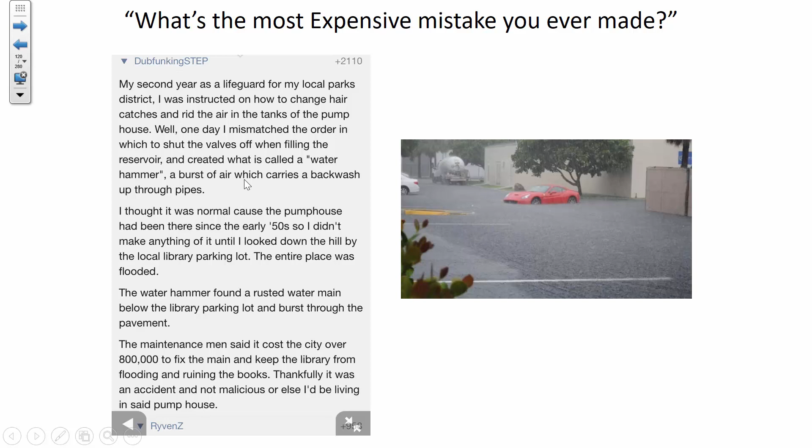So let's talk about that today. There is an interesting video that talks a little bit about water hammer. We'll watch just a couple of moments of that.

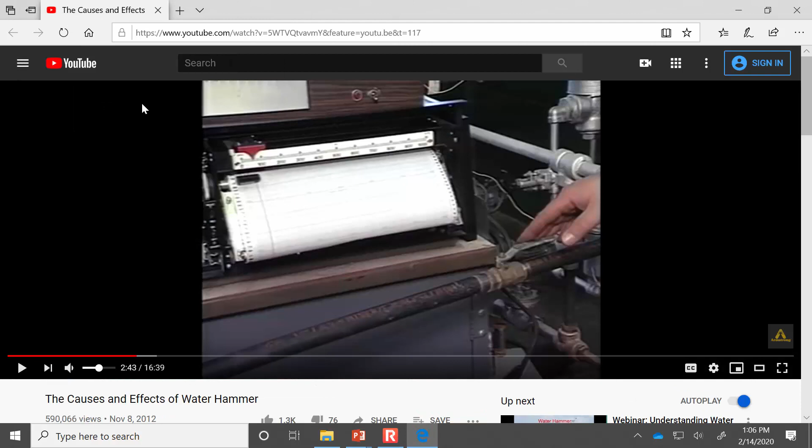It's about momentum. The water is moving through the pipe at a certain velocity, it has mass, and it's decelerating very quickly. If you look at this valve, it's just a quarter turn, and it's instantly going from all the way open to all the way closed. Now that's in stark contrast to a gate valve, where as you turn it, the gate is slowly going down, creating a smaller and smaller opening in the pipe. A ball valve can be closed very quickly, and that's why, as the water is flowing and suddenly stops, we get an increase in pressure.

So what we're going to do is talk about the conditions that cause water hammer. That illustration, I think, does a great job setting the stage. So let's consider it, in this case, starting with a reservoir, because that's as far as the water hammer will go back towards the reservoir if there's one connected to the pipe system.

Initially water is flowing in steady flow conditions, so the water velocity in the pipe is steady, it's not changing over time. The valve is open, the water is flowing freely. How you'd measure the pressure in the pipe would be the pressure caused by a certain depth in the tank. So it's pressurized here, and then the pressure is decreasing in the direction of flow, due to pipe friction.

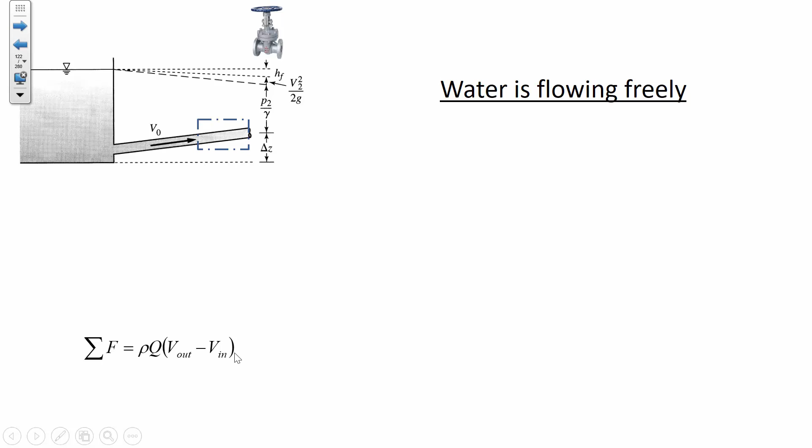So if we apply that momentum principle to this control volume, under steady state conditions, the velocity out and the velocity in are the same. So there isn't any force required to hold that system steady if the flow out and the flow in are the same. But when you suddenly close the valve, there is a temporary difference between the velocity in and the velocity out.

In this control volume, the water close to the valve—the velocity out—is temporarily lower. That's partly because water isn't completely incompressible like we often assume. Water is mostly incompressible, but it requires enormous pressures to compress it.

For a small period of time there's an imbalance between velocity in and velocity out. So the water near the valve stops, and there's a buildup of pressure because of the deceleration. Remember, convective acceleration occurs as a function of position rather than time—local acceleration is when velocity changes over time, but convective acceleration is when velocity changes in the direction of flow. So the velocity out is less than the velocity in, creating a velocity gradient that causes a pressure buildup.

So the pressure is really high right next to the valve that just closed, and the pressure wave starts to reflect backwards, traveling at a speed known as celerity.

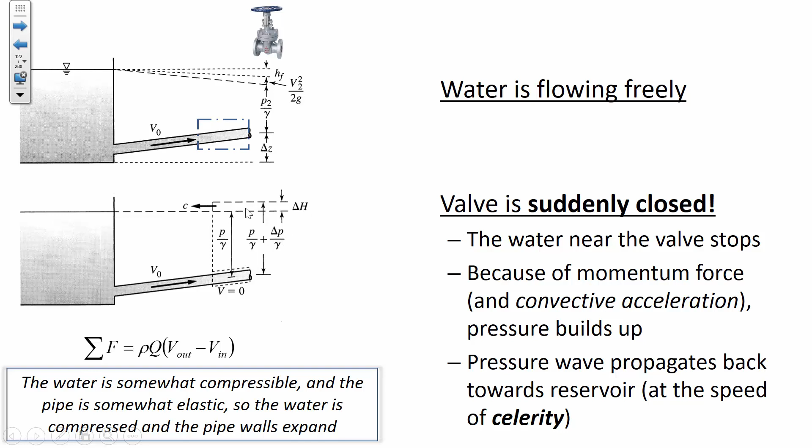So temporarily there's more energy in the pipe than in the reservoir because the pipe expanded. Eventually the pipe expands as much as it's going to, and the water stops—the velocity is zero, the pipe is expanded, and there's more energy in the pipe than in the reservoir because of that expansion.

Now the water starts to flow from the pipe back into the reservoir—the water's going backwards. The reason is that the expanding pipe is beginning to contract again, since it was holding a little extra water volume; because the pipe got bigger, there was more water in there than it would normally handle under ordinary pressures. So the water flows from the pipe back into the tank, and that shock wave is returning back towards the valve again.

So the C means the pressure wave is reflected off of the reservoir back towards the valve, now a little bit lower than the first wave was. There are some energy losses each time that shock wave reflects between the valve and the reservoir, but it can make the round trip several times before it's low enough, and before the expansion and contraction of the pipe absorbs the energy of the impact. The first video we watched talked about it as a certain mass of water that suddenly stopped—it's as though an actual hammer is hitting the valve.

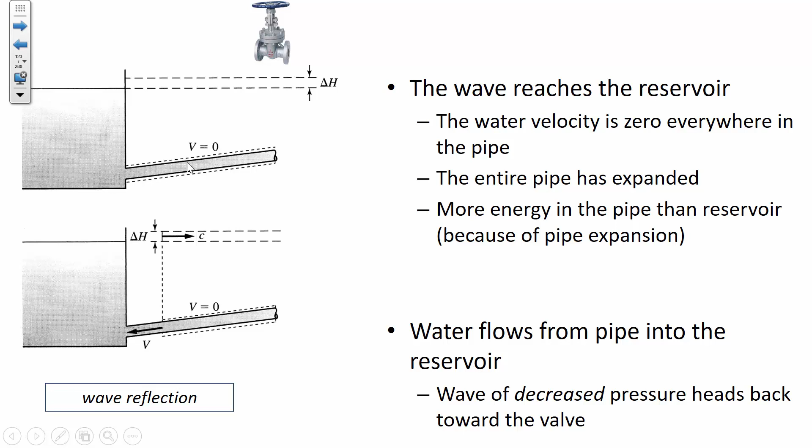Because the key to preventing this whole process is you have to close the valve slowly. If you close the valve suddenly, that causes the water hammer. But closing the valve slowly means that if you close it slower than it takes the water to go to the reservoir and back, the pressure wave won't build up.

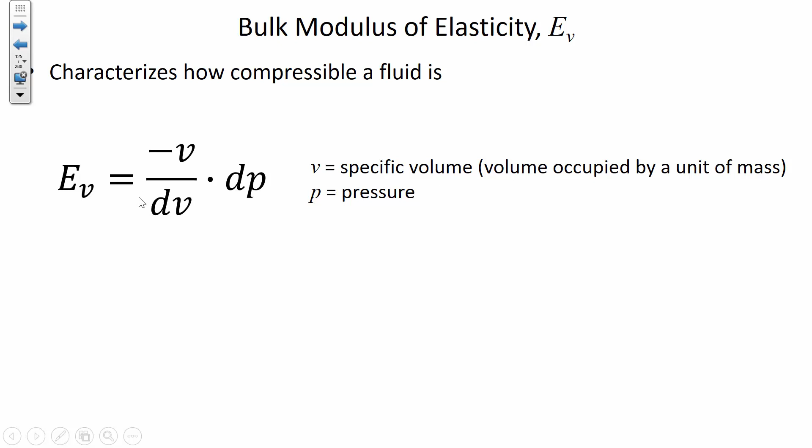Now here are the applicable equations we use. The bulk modulus of elasticity is a physical property of water that describes the unit change of volume that water occupies as pressure is applied. It's a physical constant that says how much dV, how much the water volume changes, when you apply some differential pressure. We can look up the bulk modulus of elasticity for water at a variety of different temperatures, and it changes slightly based on the pressure conditions. As the pressure goes up, it requires progressively more and more pressure to increase how compressed the water is.

In the textbook, I'll point out that Table 2.3 has a bit of a typo: these bulk modulus units are times 10 to the 9th, not divided by 10 to the 9th. So be aware of that.

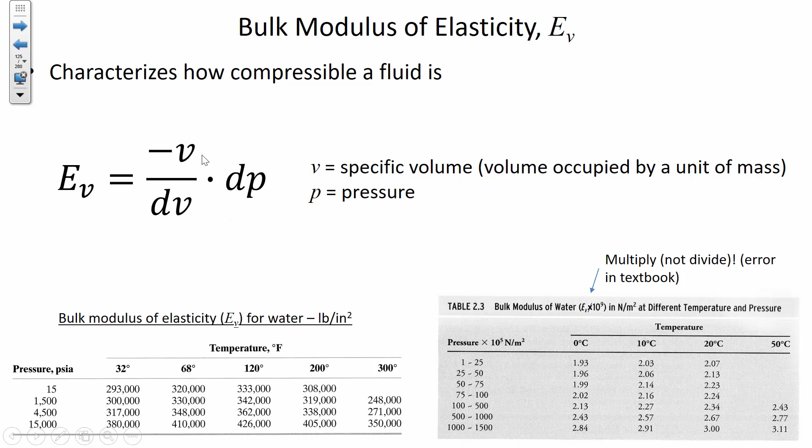So you can think of this as, for a certain volume, how much the volume decreased relative to itself as pressure was applied.

Now celerity can be estimated by first knowing what would be the velocity of water if it's traveling through an infinite extent of water not confined by a pipe wall. The typical velocity of the shock wave just through the ocean, where there are no pipes to interfere, is about 1440 meters per second, based on the ratio of the bulk modulus to the density of the water. We could calculate the same physical constant, celerity, for other fluids besides water that have different compressibilities and densities, but since we're in hydraulics, water is the fluid we're most interested in usually.

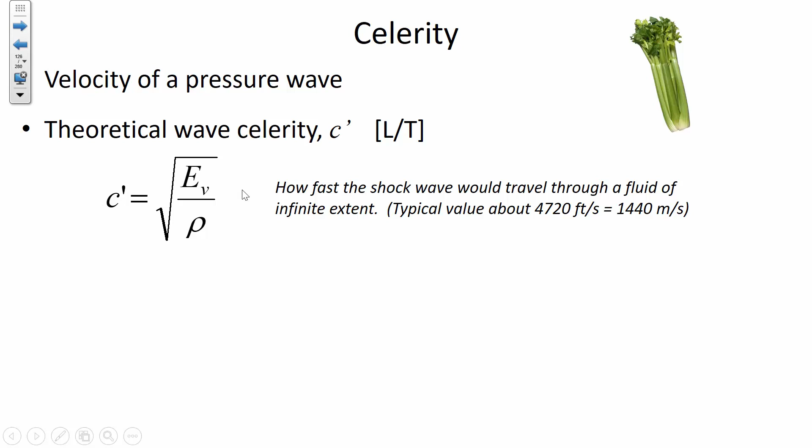So the theoretical wave celerity we can calculate just based on the physical properties, but then we have to know something about the pipe that the shock wave is traveling through. The actual velocity of the pressure wave in a confined pipe depends on the theoretical wave celerity if it wasn't in a pipe. But then in the denominator of this ratio, things like the pipe modulus, the diameter of the pipe, and the thickness of the pipe—the physical environment the shock wave is traveling through—become important parameters as well.

And so in Table 8.6 of your book, it has the modulus of elasticity for a variety of different pipe materials. Some of them are soft, like lead. If you're using lead, number one, that's not so great for environmental and health reasons. But also, because it's so soft, it can expand and contract really easily. So if there is a water hammer in a lead pipe system, it's going to be a lot more serious because more water is able to enter into the expanded pipe, and when it contracts, there's going to be an even greater volume of water traveling back towards the reservoir.

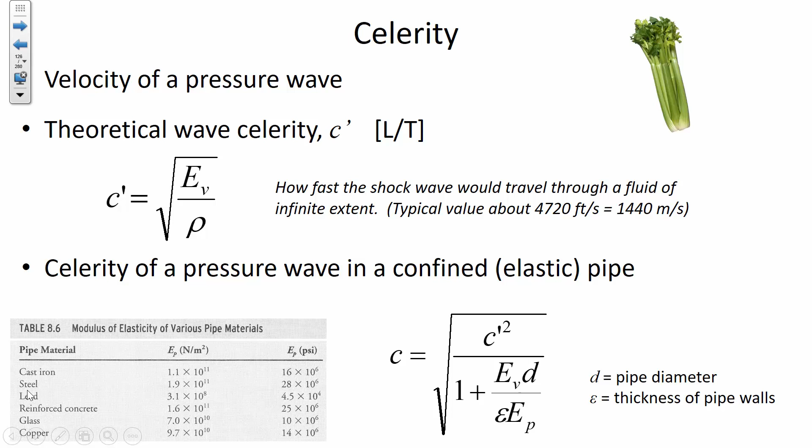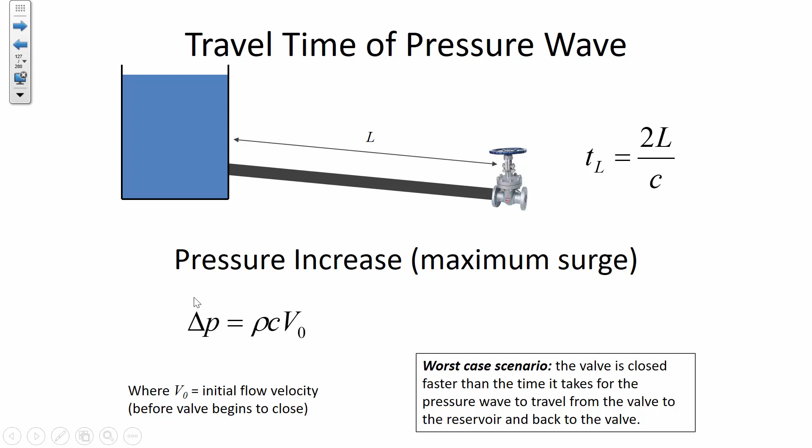If we want to know the maximum pressure that could accumulate due to this shock wave effect of water hammer, we'd need to know the initial velocity, the celerity, and the density of the fluid. The worst case is if you close the valve faster than the round-trip travel time. If you close it more slowly, it's not that there isn't going to be any pressure increase, it's just less than it otherwise would be. We have equations to calculate the pressure increase when closing the valve longer than T sub L, but this delta P formula is the pressure that accumulates if you close the valve faster than the round-trip travel time.

To get some experience using these equations, let's work this problem with traditional units, where we know the physical length of the pipe, its diameter and thickness. Here is the pipe material modulus, and the physical properties of the water: the bulk modulus and the density. We want to know what pressure increase we're going to see, the delta P, if the valve is closed instantaneously. Whether it's closed instantaneously or just less than this maximum travel time, it has the same effect.

I've laid the equations out in the order that you'll need to substitute them, starting with the average velocity, then the theoretical wave celerity, then the celerity in the pipe, and so on.

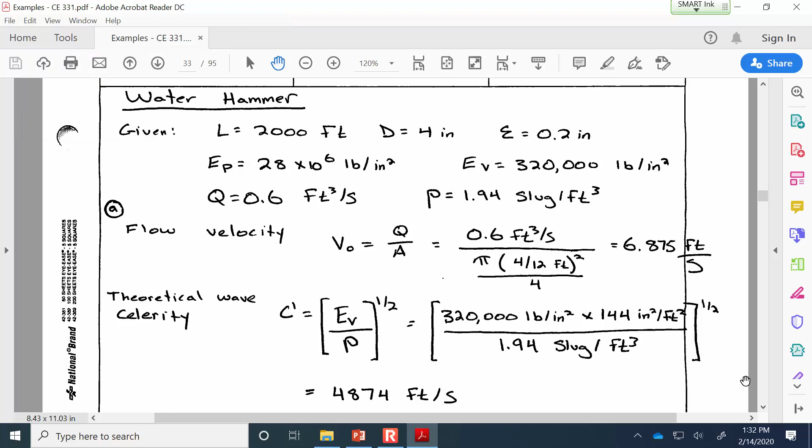You don't necessarily have to change the pipe diameter and pipe thickness into feet because it's a ratio. You could leave both as inches, but you can't have one as inches and one as feet. The same is true of the bulk modulus of elasticity and the pipe compressibility—you can leave those both as PSI. You don't have to change those to pounds per square foot, just so long as the units are the same in the numerator and denominator of the ratio.

But ideally if we converted each of those values, it still should be the same. It will.

So is this a lot of pressure, 407 psi? Yeah, that's a lot, about 4 times normal. 100 psi would be maybe on the high side of what you'd expect to see in a municipal network. So 400 psi is probably going to cause fittings to break or a water heater to explode. It seems like water heaters are maybe the weak link sometimes when pressure gets too high in a network.

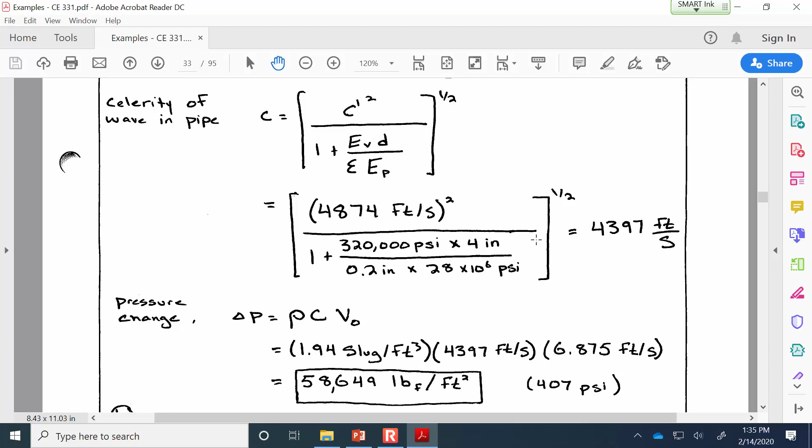So the minimum time to close is 0.91 seconds.

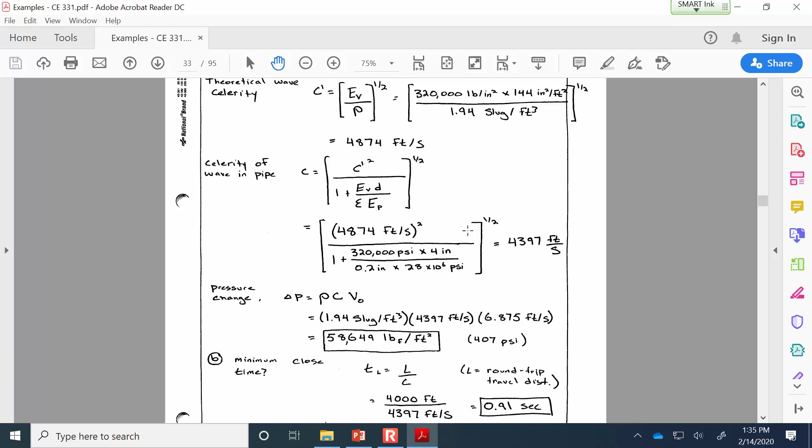Need to leave it up a little bit longer. Got it? He went ahead and did the calc since it was 2,000 feet—it's 2 times 2,000. Your homework assignment has a problem similar to this one, asking you to figure out the pressure increase and the minimum close time. You'll apply the same technique for that homework problem.

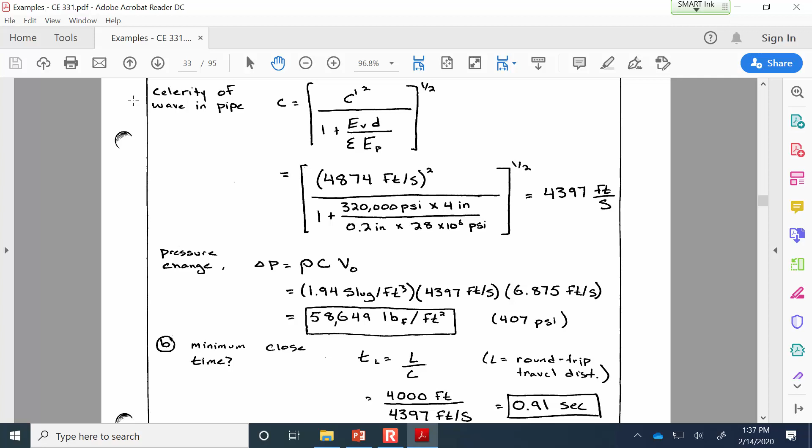If you're closing the valve longer than the minimum time, our book identifies an empirical equation that estimates what the pressure increase would be. We won't work an example, but you calculate a factor having to do with the initial velocity and valve closure time—it's a reduced pressure, but it could still cause trouble. In really high value systems like a water treatment plant, there are sometimes computer-controlled valves that close on a programmed basis, slowly, so an operator wouldn't manually close it too quickly.

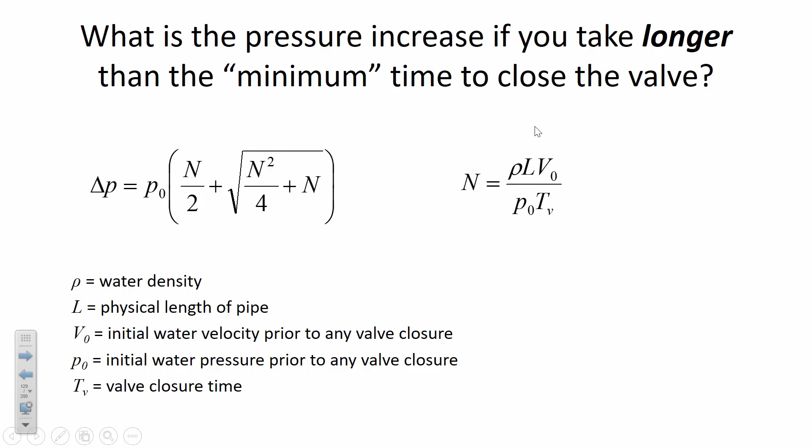And of course, in the animation we watched, they showed you, in a residential setting, what could be used as a shock absorber to reduce the effect of the water hammer. But another approach is to put in a surge tank.

What the surge tank does is, rather than having the pipe expand because of the increase in pressure, it allows the water level to rise some height inside a tank open to the atmosphere. It could also be enclosed, but the gas above it would be compressing, so it might not have exactly the same effect as one open to the atmosphere.

Our book has a formula for the maximum height of a surge tank that's required. It looks at the amount of water you expect to accumulate inside the surge tank, and it has to do with the diameter of the tank—therefore the ratio of the cross-sectional area of the tank to the area of the pipe.

The extra water has to go somewhere. So if you put it in the tank, the pressure doesn't build up and there won't be the same catastrophic damage.

In this example, let's assume we have the same 2,000-foot-long system with a 4-inch diameter pipe, and we know the initial flow velocity—that was calculated in the last example. What diameter of surge tank would be needed if we allow the surge depth to be 1 foot? In other words, if that's the limit we could tolerate, what cross-sectional area of the tank is needed? Once you know the cross-sectional area, calculate the diameter, assuming it's circular. You'll be solving for A sub t.